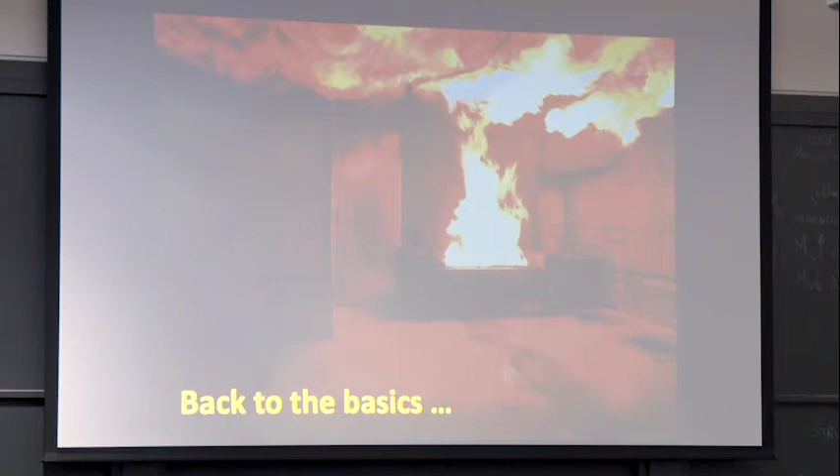So let's go back to the basics and figure out what they were trying to do. Effectively, what they were trying to solve was an energy balance. They wanted to solve the fire dynamics in such a way that you could develop a net heat flux, or the boundary condition for the structure, so that you could actually solve the heat transfer equation.

So if you take the simplest form of the one-dimensional transient heat transfer equation, the boundary condition at the surface is going to be this Q net. This becomes the goal that we're aiming at, that's what we want to obtain. Once I put the boundary condition, I can solve the energy equation, and with the energy equation, the structural engineer can perform a structural analysis. So that's the basic principle.

So at the end, the goal is to obtain this Q net. This is really what we're aiming at, okay? And for that purpose, we are going to try to solve all the energy balances within that compartment.

Now the problem is that, as with all fire problems, the moment you start digging into it, you realize it's a little bit more than what you thought. Many times we have to chew more than what we can, and this is exactly what ended up happening at this point.

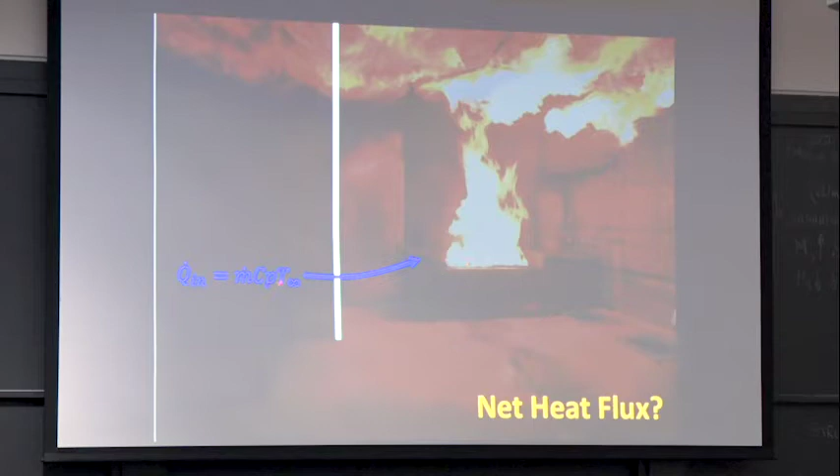So basically you have the easy term, which is the energy entering the control volume, which is going to be the mass of airflow coming into the control volume times the specific heat times the ambient temperature. That's the energy input from the air.

Then you're going to have the energy generated, which is the heat release rate, the burning rate multiplied by the heat of combustion. Okay, now then you have the energy that leaves the control volume, but in this case the temperature doesn't have to be constant.

So effectively you're going to have a temperature distribution in Y and Z leaving the door, times the specific heat, times a flow rate that also varies along the opening. So you have to have a double integral of the energy being advected through the door, plus the area of the opening multiplied by the radiation that is being expelled.

So effectively you have a hot room and it's radiating out. You're losing energy through radiation and through advection, mass that is taking energy outside the compartment. As you can see, because you have distributions of temperature around the compartment, effectively you have to solve this as a function of the surface area of the door.

So here's energy in, energy generated, energy out. If you do energy in minus energy out plus energy generated, that gives you the change of energy in the control volume.

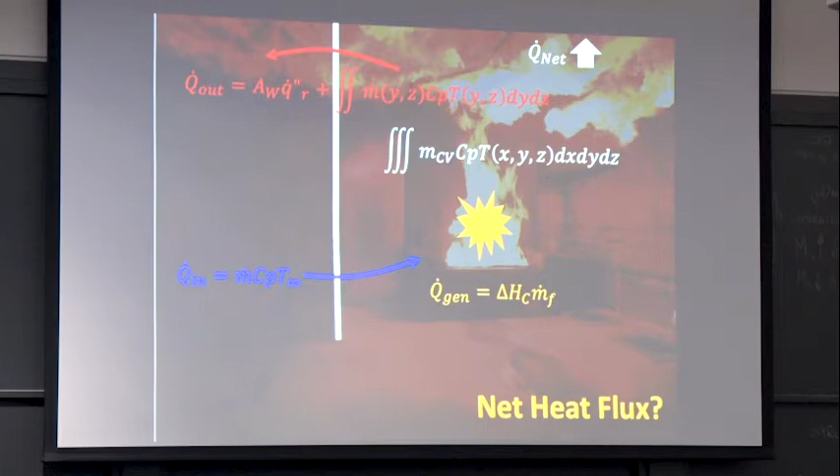Now in this case, it's a triple integral because it's the volume of the compartment, and it's going to be the mass of the control volume, the specific heat, times the temperature of the control volume in X, Y, and Z. So if I want to do the full energy equation, effectively this is what I get.

So the change of energy of the control volume is equal to the energy generated plus the energy in minus the energy out minus the energy going to the structure. So it's just a simple energy balance in concept, but an incredibly complex problem in practice.

Each one of those terms is incredibly complicated to obtain and very, very difficult to model. It is perfectly clear that even today our CFD tools cannot model this type of compartment fire, because keep in mind that we are in the ventilation limited regime. In other words, we don't have enough oxygen entering the compartment, so we have very incomplete combustion.

And modeling incomplete combustion requires you to be able to resolve the flame thickness. We don't have the capacity to resolve the flame thickness, so we cannot introduce the chemistry, and because we cannot introduce the chemistry, this is very difficult to model.

This makes the assumption that combustion happens only inside the compartment, not accounting for burning in the exhaust. Actually, that's not the assumption, because my control volume is the compartment itself. It could be burning partially in here. I haven't defined what this number is, or the completeness of the combustion, so whatever extra spills out of the compartment might burn outside. That's effectively the problem.

Very rapidly it became clear that you could not do that, and even now you still can't. I was talking about Hoyt Hottel's paper at the beginning, discussing the history of fire research, and the ideas of Thomas and Kawagoe, how they started this field of science, if you want to call it that. That was all in the first paper by Hoyt Hottel.

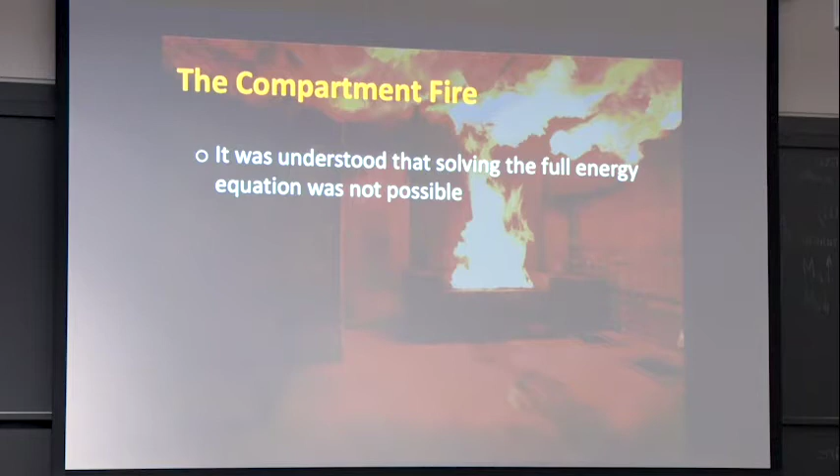In the final paper, by Howard Emmons, titled 'The Next 100 Years,' he predicted that the full solution of this energy equation would not be solved until 2050. That was Howard Emmons' prediction. I'm more and more confident it's going to take a lot longer than that. He wrote that in 1986, expecting 2050 to be the moment we'd finally solve this energy equation correctly. We'll see what history tells us when we get there—though probably I won't get there.

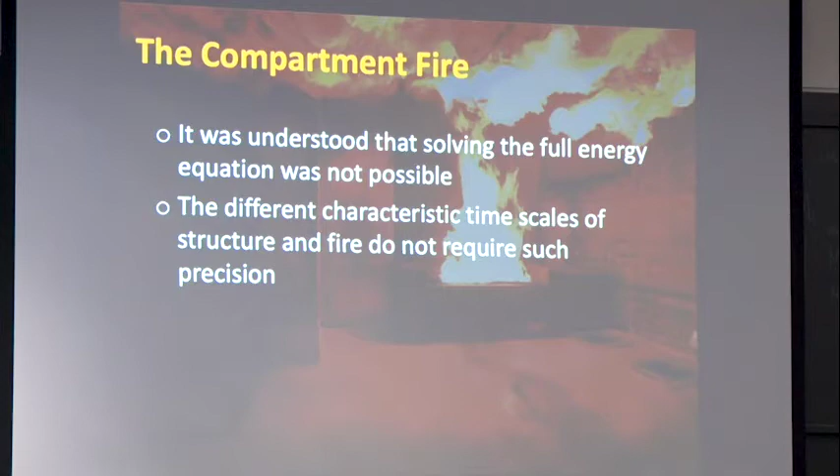The different characteristic timescales of the structure and the fire don't require that precision, fortunately, because the combustion processes are incredibly rapid compared to the heating of the structure. So averaging in time is actually very appropriate here, because all the fluctuations of combustion are somehow irrelevant to the heating of the structure, which heats up very slowly. Effectively, the structure acts as an averaging process, damping the impulses from the fire, integrating all the changes. Because the structure heats up so slowly, that allows massive simplifications in the problem.

So we looked for a simplified formulation: Thomas's compartment fire formulation. This is what a Thomas compartment looks like. It has a restricted area—this would be the restricted area of the compartment—and restrictions on window sizes. It's a very simple, small box, roughly cubic in nature, consistent with Victorian era buildings. Thomas describes two regimes.

It's really interesting how those regimes are described. In the picture on the left, you have a small compartment with a small window, which allows smoke to fill up the compartment. Once the smoke fills the compartment, velocities in the interior drop to almost zero, because the smoke doesn't allow the flow to move inside. All the exchange of mass happens at the window or door. So the compartment is completely filled with smoke to the point that velocities approximate zero, and all the exchange happens at the door. The velocities die out rapidly, and you get all the mass exchange happening at the door, based on hydrostatic pressure—low density here, high density there—creating a pressure difference between inside and outside that drives the flow exchange at the window.

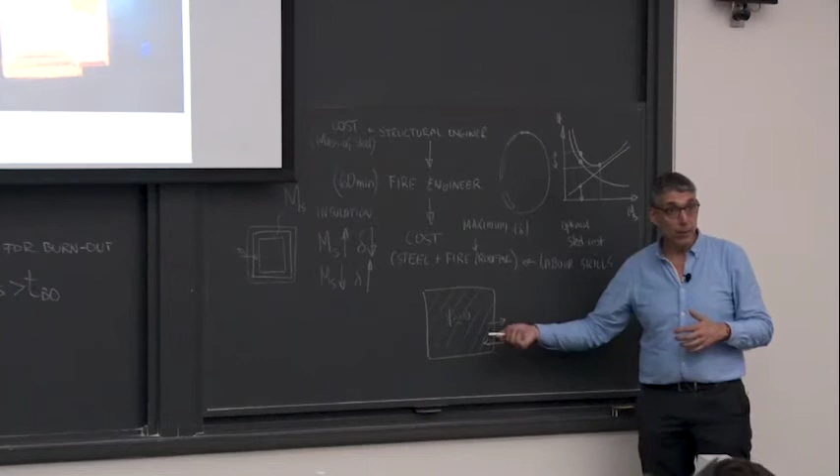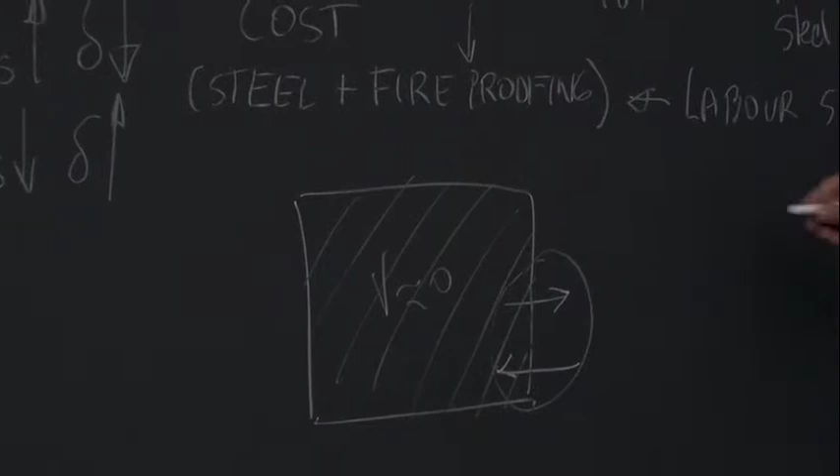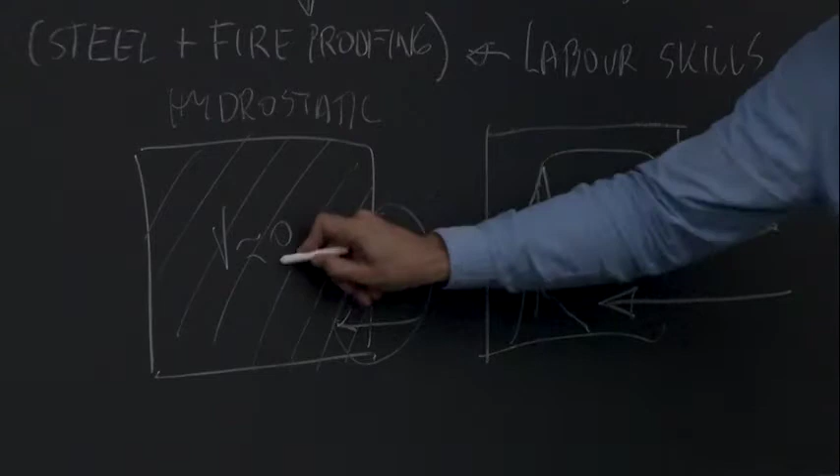Because the velocities go to zero, the fluid mechanics disappears—this is purely a hydrostatically controlled problem. All that controls it is what's happening at the door. Now, if I open the window and make it much bigger, I get a completely different problem. Here's my fire: it acts as the pump. Flow comes in, goes up, hits the ceiling, creates a stagnation flow, and goes back out. The velocities are much greater than zero throughout the compartment. So this one is hydrostatic—velocity equal to zero—and this one is momentum driven.

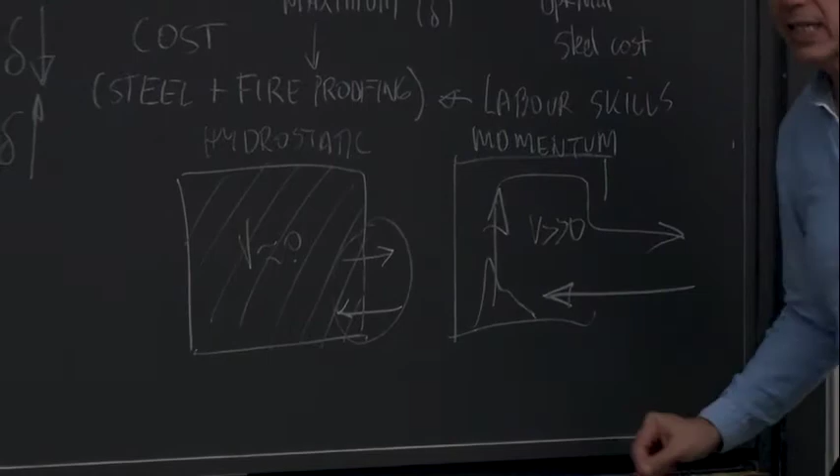Now, the problem is that if it is momentum driven, and you have this very large velocity going in and out, you have to solve the fluid mechanics. The fluid mechanics are incredibly complex in this case, because you have a buoyant flow confined by this compartment, creating a flow field that is incredibly complex. That flow field determines the characteristics of the combustion, and the characteristics of combustion determine the total heat transfer to the structure.

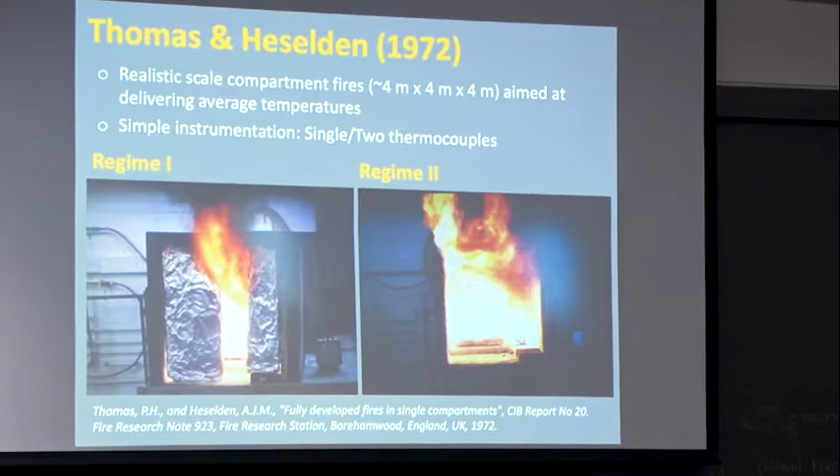So this problem Thomas deemed unsolvable. He says, there is no way I can solve this problem. This one, I can. The moment the velocities go to zero, I don't need to solve the fluid mechanics, and I can treat the problem as purely an energy balance within a static control volume, where the energy being created is purely controlled by the hydrostatic supply of oxygen into the compartment. Keep in mind, I have excess fuel, so all the oxygen that comes in gets consumed.

So the heat release rate is a function of how much oxygen I can get in. I can calculate the heat generation directly by doing a hydrostatic Bernoulli calculation at the door. Here, I cannot calculate the heat generation because the oxygen is entraining so much that I have no idea how much air I'm bringing in, and no idea how much fuel I'm burning. I'd have to calculate the burning rate and all these things. So there, there's no way I can calculate the heat generation, while here it's just a matter of how much oxygen I'm bringing into the compartment. This problem is infinitely simpler than that one.

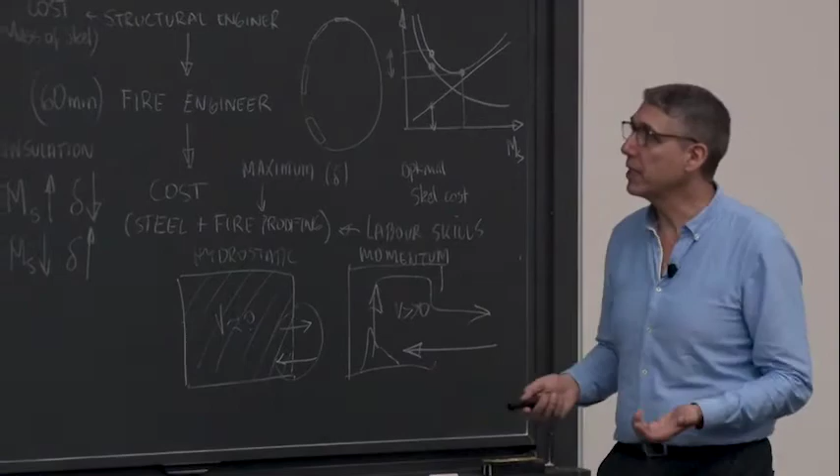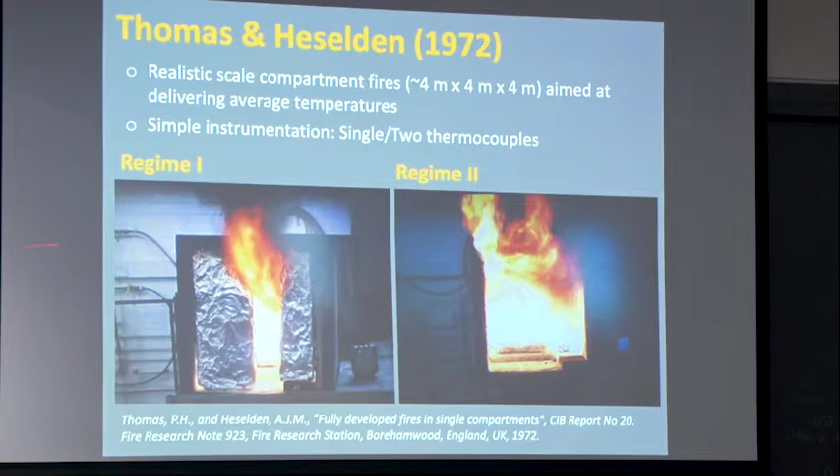That's exactly what Thomas did. Thomas and Heselden, this is the main paper of Thomas. He said, let's split the problem in two. We're going to have regime 1 and regime 2. Regime 1 is perfectly solvable, I can give you an answer to that problem. Regime 2, I have no clue—you shall not build like that. Pure genius, no? Having the power to do that, to say you shall not do it because I don't understand it—it's really a powerful message.

So for the case 1 that we can solve, isn't it like the flashover condition that we're avoiding?

No, this is all post-flashover. So basically this is fully developed, because the smoke is accumulated all the way down. Yeah, you fill the compartment because you flashed over, so you have fuel all over the place. So they're both fully developed. Now, many times this one is confused with a growing fire, but it's not a growing fire—everything has ignited, so it is flashed over.

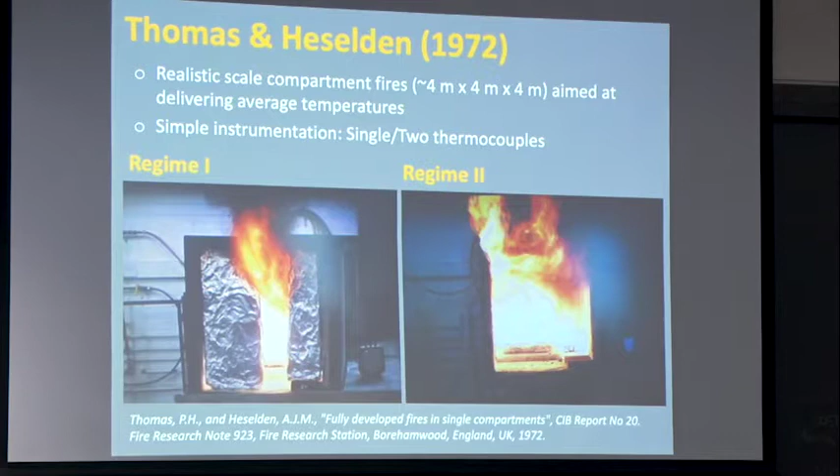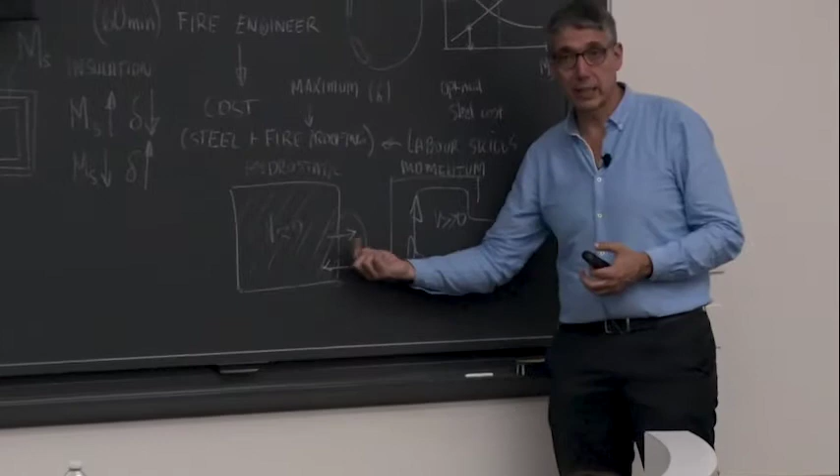It's just that because it's momentum driven, it creates such a flow field that it still has two zones, the hot zone and the cold zone. But the hot zone is radiating so dramatically that effectively you are post-flashover—if you put any solid in there, it will ignite. It's simply a different regime that is momentum driven. So the difference between the two is that one is hydrostatic driven and the other is momentum driven. You don't know what the stoichiometry is here, so I don't know if it's under-ventilated or over-ventilated—I have no idea, because I cannot recreate the fluid mechanics. This one I know is fuel rich, because I can calculate how much oxygen gets into the compartment. But this one I have no clue.

So effectively those are the two regimes. This is a perfect example of a fire in regime 1. If you look at it, it almost seems that's not the case, because what Thomas is doing is an approximation—air has to go in, there's going to be an area clear of smoke at the bottom, a gradient of temperatures, and smoke isn't going to be all over the place. But basically what he's saying is you can approximate it as such. That's the approach, but this would be a typical case of a regime 1 type fire.

Sorry, what was he solving for? He was solving for... I haven't got there yet, I'm going to get to the solution.

So I'm just explaining what the two scenarios are, and then I'll explain what he was solving for. What are the assumptions he's going to make for regime 1? Before we can solve it, we have to go through the assumptions.

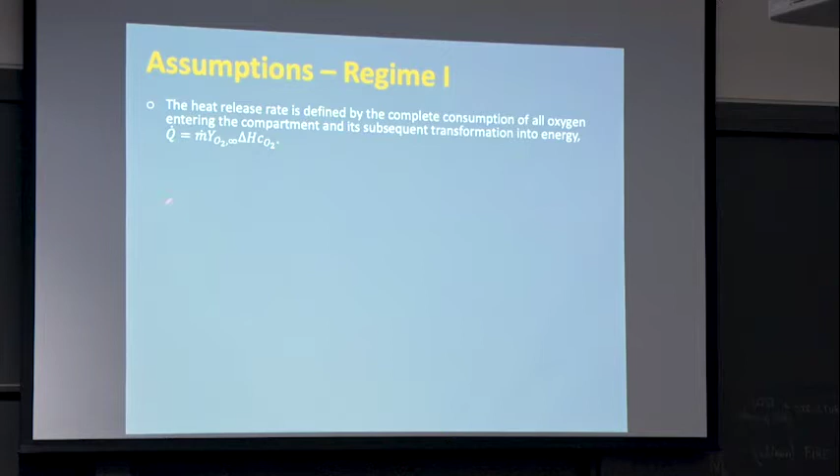His first assumption is that the heat release rate is defined by the complete consumption of all oxygen entering the compartment, and its subsequent transformation to energy. Effectively he's saying it's fuel rich - all the oxygen that gets into the compartment will be consumed and turned into energy. That changes the problem of the heat of combustion to be the heat of combustion per kilogram of oxygen. So this number becomes 13.1.

So you have 13.1 megajoules per kilogram, the ambient oxygen concentration, and the mass flow at the opening. That gives kilograms of oxygen per second multiplied by joules per kilogram of oxygen, giving joules per second, watts. So the heat generation is defined by this very simple expression.

You're consuming all the oxygen, the concentration of oxygen inside the compartment is assumed to be 0. What does that do for the energy equation? It eliminates the need to define the oxygen concentration in the outgoing combustion products because it's 0 - all the oxygen is consumed, nothing is coming out. It eliminates the need to resolve the oxygen transport equation within the compartment because you're turning everything straight into energy.

It limits the analysis to scenarios where there is excess fuel availability. That is a constraint, but it's accepted that in regime 1, that's what is happening. The chemistry is fast enough to consume all the oxygen transported to the reaction zone - you're assuming a very strong fire, very strong combustion reaction, very fast chemistry. You're consuming all the oxygen, nothing gets out.

The control volume acts as a perfectly stirred reactor - he's assuming everything is homogeneous. So while we know there are some temperature gradients and concentration gradients, he is effectively assuming everything is homogeneous. So I'm dumping energy into the compartment, shaking it like a perfectly stirred reactor, and it has an homogeneous temperature distribution. The heat of combustion is assumed to be invariant.

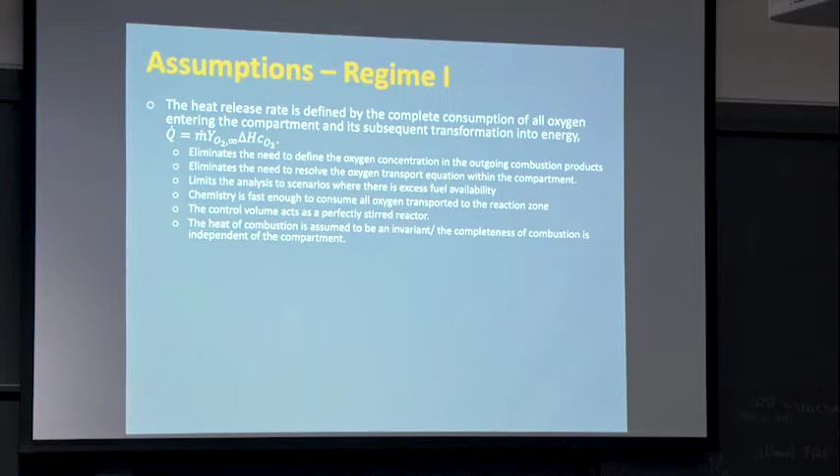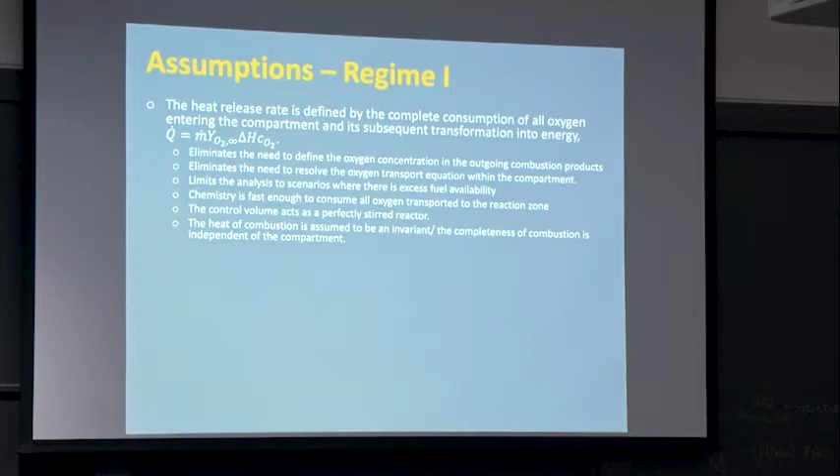The completeness of combustion is independent of the compartment. So effectively, he is not doing incomplete combustion, he's doing complete combustion, thus having the worst case scenario. You could put a combustion efficiency fraction if you want, but the reality is he stayed conservative and said let's make it complete combustion - 13.1 is what we're putting in there.

The second assumption was that radiative losses through the opening are assumed to be negligible. Therefore, Q out is treated as an advection term - all you get is convective flow coming out because you're assuming radiation out of the door is negligible. Interestingly, Harmathy didn't believe Thomas, and he went and did a whole bunch of experiments to prove Thomas wrong, and he ended up showing that Thomas was right.

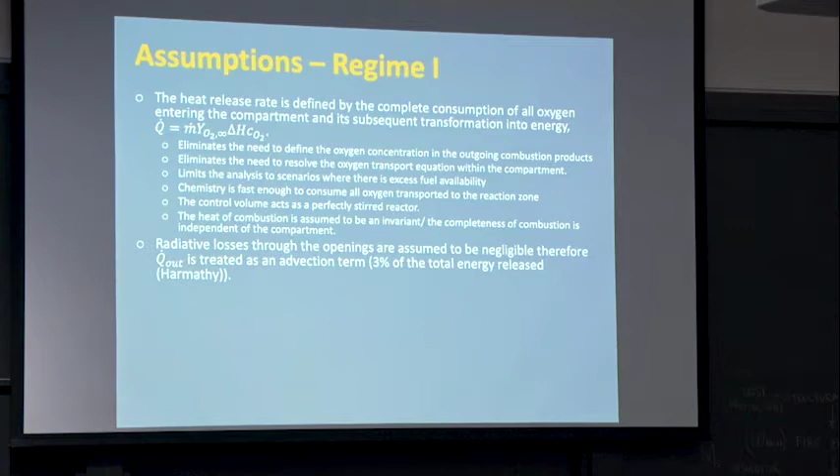He published a really nice paper showing that of the total energy release, about 3% goes away on radiation. This is because you have a small opening - the processes happening in and out are so rapid that effectively you're generating a massive amount of energy.

In reality, if you look at it, you have a small opening and your radiation is a fixed temperature times an emissivity of 1 times sigma T to the 4th - so it's a fixed number. If I generate 10 times more energy, I make this relatively smaller. You're generating energy so rapidly that effectively your losses due to radiation are negligible compared to everything else. This had to be proven by experiments, and that's what Harmathy did.

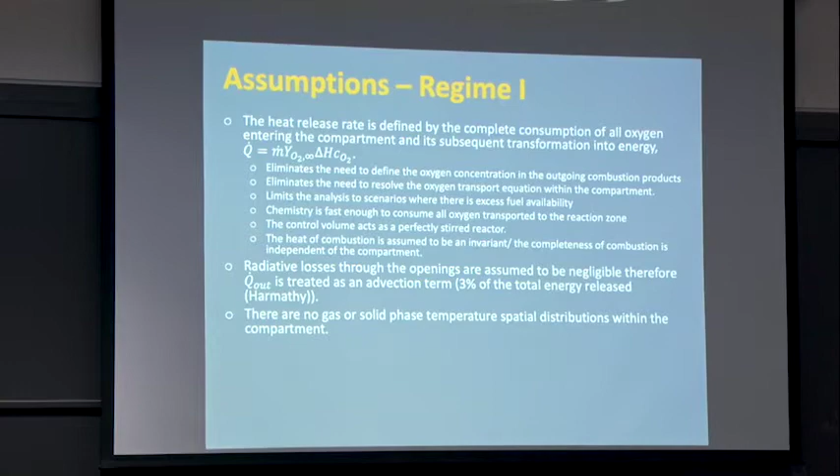So there are no gas or solid phase temperature spatial distributions within the compartment - in other words, he assumes the whole compartment is at the same temperature. So there's only one solution to the problem, which is the temperature of the compartment. That's what he's going to try to obtain. If you have the temperature of the compartment, then you can put a heat transfer coefficient and find your heat flux to the structure.

So the solution to this will be what is the temperature of the compartment, and there's only going to be one because it's not spatially resolved - it's a perfectly stirred reactor, everything is the same temperature.

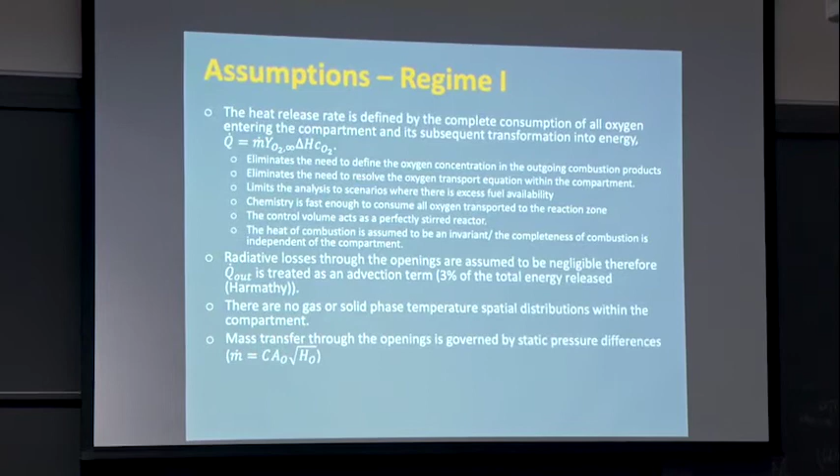The mass transfer through the openings is governed by static pressure differences. In other words, it's Bernoulli. So this is an orifice plate correlation that basically says the velocity is proportional to the square root of the height of the opening, okay?

And the velocity multiplied by the area gives you the flow rate. And then the density and all the other terms, gravity, they all go into this constant C. So if you do Bernoulli on an orifice plate, you're going to get that expression with a bunch of constants, and all the constants go into this term C.

So basically, he evaluated the C, and they came up with values that were appropriate. And again, there was another exchange between Thomas and Harmathy into what should be that value of C. There were different values proposed by both Harmathy and Thomas, but at the end, they actually converged on a value of 0.5. Okay, so effectively, those are all the assumptions.

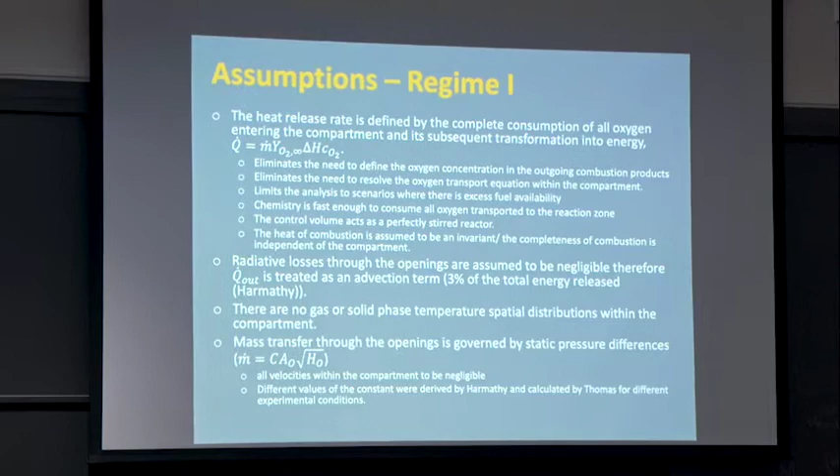How do you categorize which is regime 1 and which is regime 2? Is there a relative size of the opening? Because I'm assuming the 3% was tied to a special case.

Yeah, so this is all regime 1. How do you say it's regime 1 versus regime 2? Well, I'll show you. So they're basically going to come to the conclusion of what is regime 1 when the theory doesn't work. So you put the theory, you put the experiments, and when the experiments deflect from the theory, you say that's the separation of the two.

Keep in mind the arguments between Thomas and Harmathy happened after Thomas published his paper. So he already had defined regime 1 and regime 2, so when Harmathy went and validated the correlation, he was doing it only for openings that corresponded to what Thomas had labeled as regime 1. Okay, so this is what he did.

So basically, this is your energy equation now, according to the simplification. So basically, I have a single temperature, that's the temperature of the compartment, that represents the whole temperature of the control volume, and the control volume will be this entire thing. Okay, so it's the mass of the control volume times the specific heat times the temperature.

And so the change of temperature with respect to time, the energy of the control volume change with respect to time, is the heat generation plus the heat in minus the heat out minus the net that goes to the structure. Is that okay? So the first thing you can simplify is that Q in is much smaller than Q out, because Q in is fresh air coming at ambient temperature, so it's mCp T infinity.

Now this is very important because we need to understand what is A. A is the area through which heat can be transferred. So what is physically A then? The area of all surfaces? Yes, minus the openings, because the openings are accounted differently. So it's the area of all the surfaces minus the openings.

Now, are you losing heat through the fire? No, so the fire is burning at the bottom, so it's minus the floor. Is that okay? So this area is the net area of Thomas, and effectively is the entire area of the compartment minus the openings minus the floor, because the floor is where the flames are, so no heat is being lost to the floor.

You look with a very skeptical face, Tarek. Yeah, sorry, I missed the reasoning there. I don't understand that. Okay, so this wall is colder than the fire, so you're going to lose heat through this wall. You're not going to lose heat through the openings because I already accounted it as a flux. Okay, so basically it's energy in, energy out. There's no surface through which there's conduction in there.

It's just basically convective. So I can take from the total area of the compartment, first of all, I can take the openings out. Is that okay? Now, if you look at the floor, and the floor is all burning, keep in mind this is post-flashover. Who is hotter, the floor or the fire? I mean, the fire is emerging from the floor.

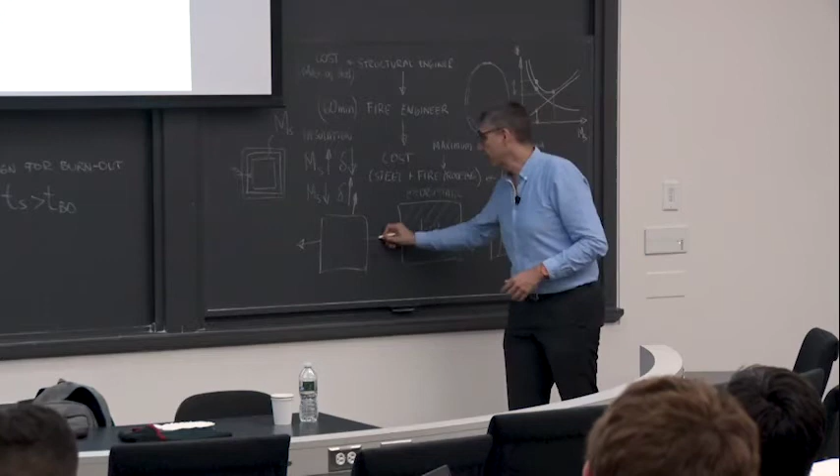Okay, so if I look at my control volume, this is your control volume, okay? This surface of the control volume is losing heat. This surface of the control volume is losing heat. This surface of the control volume is losing heat. This surface of the control volume is putting heat in. That's where my heat generation is coming from.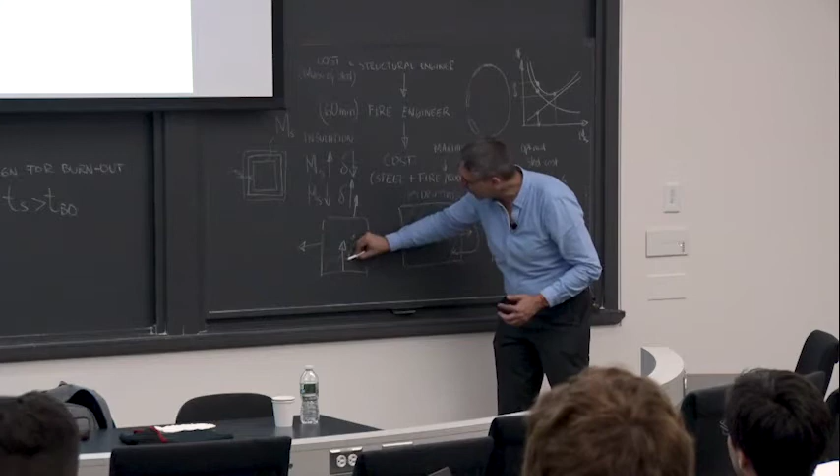Okay, that's the way he frames it. And of course, the flames are somewhere around there, okay? But his control volume is defined outside the flame. Keep in mind, there's no reaction, there's nothing. He's just basically putting energy into the control volume. He knows what the quantity is, and that energy is coming from this surface of the control volume.

And of course, behind the control volume, there will be another control volume, where this flame is actually losing heat this way, is producing fuel that way, okay? And there's going to be heat losses to the back. But that's a different control volume.

Is that okay? Yes, I was going to ask why can't we extend our control volume down if we're concerned? Of course you can, you just don't want to.

It's too complicated, just keep it simple. Keep the control volume close in there so that you can actually have a box of gases that is getting energy, that's all he wants. It's pretty straightforward. You can complicate this as much as you want, but that's not the point. The point is to make it simple.

So don't lose focus, okay? We want the temperature of the gas. We don't care what's happening with the flame, okay? So here we have all our terms.

The first thing he says is, I'm going to make the problem steady state. Why does he make it steady state? Because he says that effectively I can average the combustion endlessly, and it doesn't really matter. The worst condition will be when the structure has reached its steady state. That will give me the hottest temperature of the fire. So if I use the hottest temperature of the fire to do my heat transfer, that's a worst case scenario.

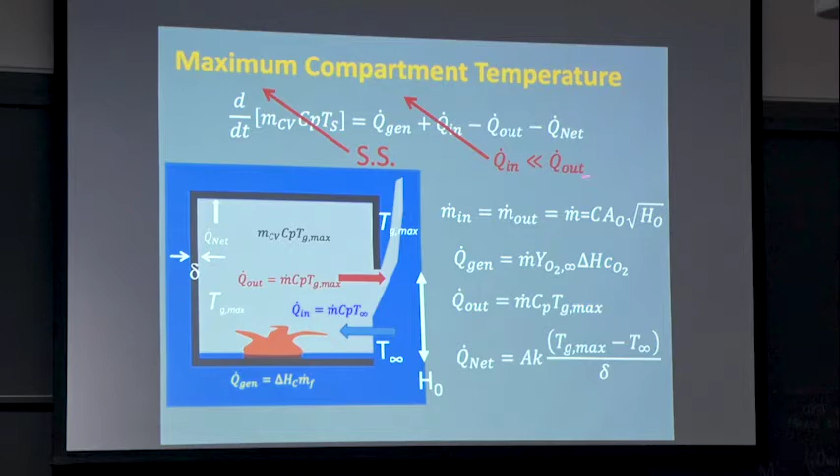I get the maximum temperature of the compartment, and if I use that as a reference to calculate my entire heat transfer, I will get the worst case scenario. Is that okay? So there it goes, the term goes away, becomes 0. Then Q in goes out because Q in is much smaller than Q out. And then the equation that he needs to solve is this.

Is that okay? So this gives you this as an answer when you substitute everything, and I'll show you what the different terms are. So effectively, all I'm doing is I substitute the heat generation, which is going to be the mass times the concentration of oxygen times the heat of combustion. I know that. I'm going to substitute the Q out as being the mass times the specific heat times the maximum gas temperature, the temperature of the gas.

And then the Q net, I'm going to substitute it as the total area, the net area, times the thermal conductivity, times T gas minus T infinity over the thickness of the wall. So I plug all this here, and I solve for the temperature of the compartment.

Is that okay? When I solve for the temperature of the compartment, this is where the genius comes up. So effectively, you solve for the temperature of the compartment, and you get two characteristic temperatures. And in a way, this is what effectively results in the elimination of combustion from the problem by understanding what you're doing.

So, the two characteristic temperatures. One is TF. What is this? The adiabatic flame temperature, no? A very simplified version of the adiabatic flame temperature, the maximum possible temperature you could get. So basically you're taking all the energy and converting it into temperature. So if you divide by CP, you get the maximum possible temperature you can get. So this is the adiabatic flame temperature.

Now, what is this? So basically, this is what he calls the conduction temperature. And the conduction temperature effectively tells you this is the energy that I'm generating, and this is the energy that is being conducted. So it's telling you what fraction of your energy is going through the walls as opposed to staying in the compartment. So, for example, if you have a huge thermal conductivity, then what happens is that your conduction temperature goes to 0.

So if you have an extremely large area, a lot of energy goes down the area, your temperature goes down to 0. If you get a big opening, still within regime 1, but if you get a big opening, that means that you're producing a lot of energy, so this conduction temperature goes up. So every single parameter becomes meaningful. Now, if you look at it in this equation, if your thermal conductivity is very high, okay?

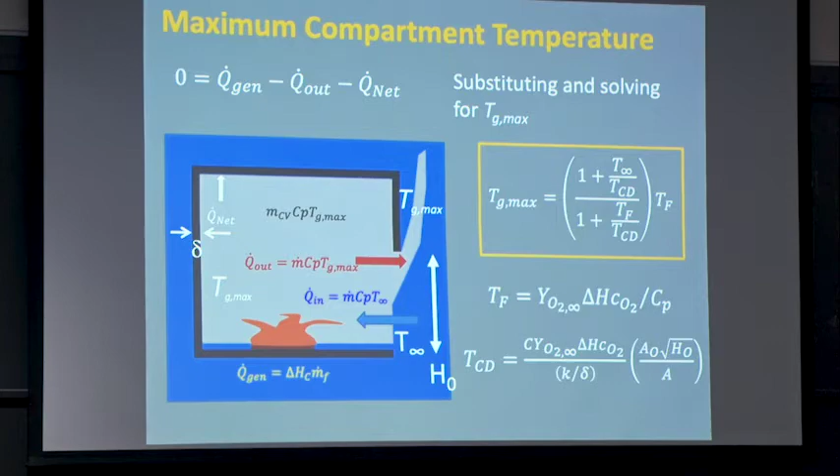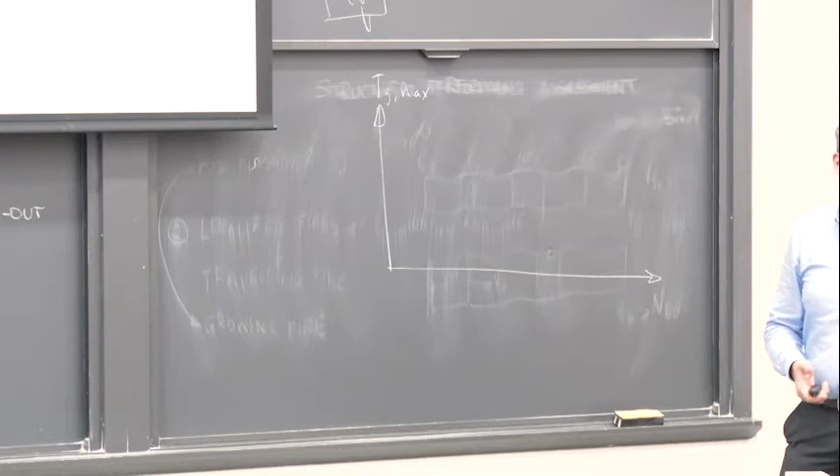So if all the energy that you produce immediately gets out through the walls, your compartment stays at T ambient. So, according to Thomas, the theory says, if I put TG max in here, yeah. So if I put TG max here, okay, and the way he does it, he says, well, all these are constants, okay? The only variable is this.

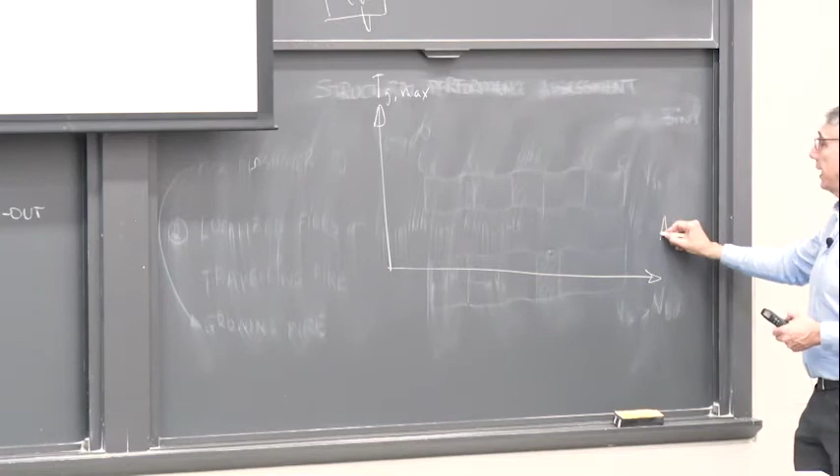So if this term is 0, then TCD is 0. If this term is very large, then this term is very large. So this is equivalent to playing with the conductivity. This is what he calls the ventilation factor. So instead of plotting it with the thermal conductivity, he plots here A0 square root of H0 over A.

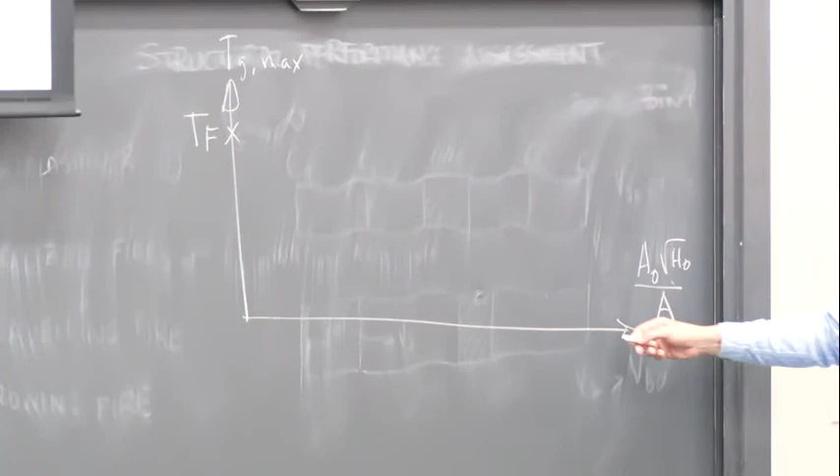So if this term is 0, you get the adiabatic flame temperature. And if this term is very large, you get T ambient. There's your theory. Obviously, it's going to curve towards the end because it's asymptotic at this point, but he wisely truncates it at some point. But that's the theory.

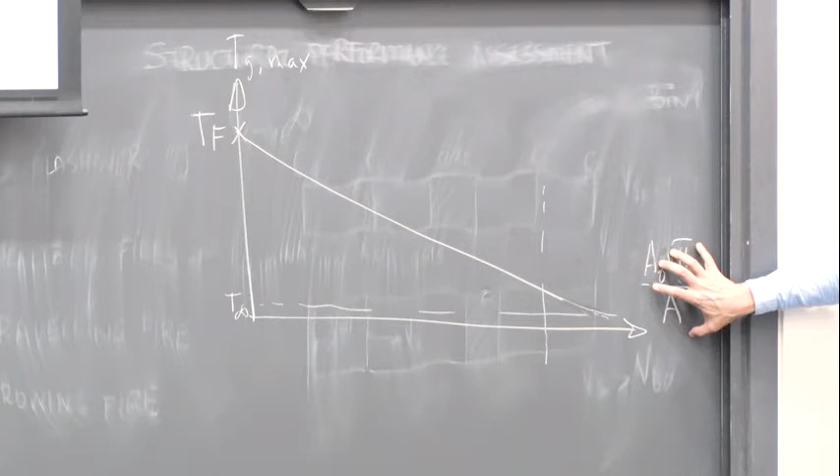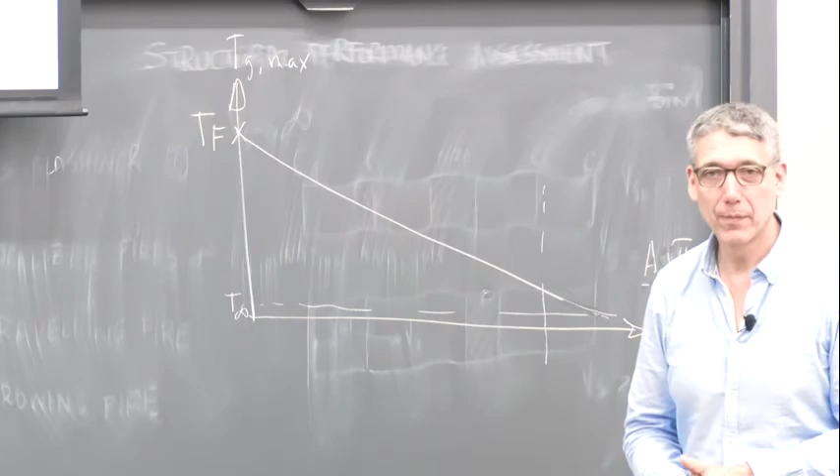Are we happy with that? And the theory depends only on one single variable, which is a ventilation factor. And that variable happens to be purely geometric. So given that it's purely geometric, for Thomas to know what the temperature of the compartment is going to be, who is the only professional he needs to talk to? The architect.

Little conversation with the architect, this is the size of the window, this is the size of the room, done. 1,000 degrees. Brilliant, no? Then he can give that to the structural engineer who can multiply by a heat transfer coefficient, they get a heat flux, they can calculate the temperatures, and they can do their job if they wish to, which they don't, but you know. But in reality, problem is solved, no?

I mean, it's an incredibly powerful framework. Simplifies not only the calculations, but the process. Because the architect can design freely, he only has to give you the ventilation factor. So what happens?

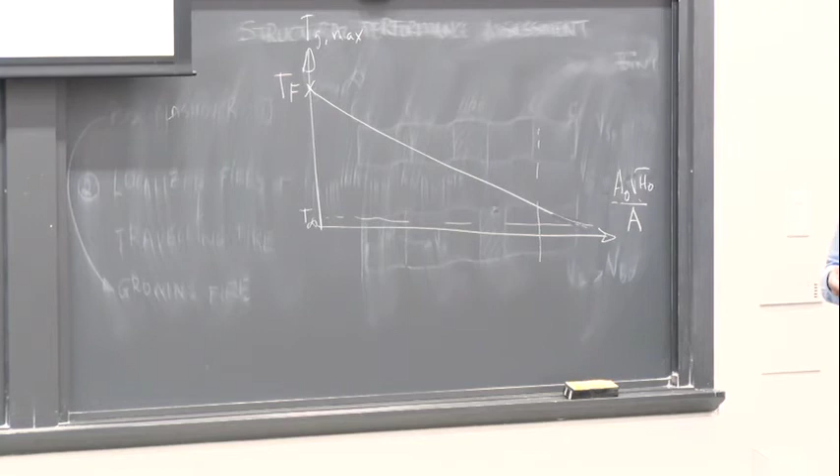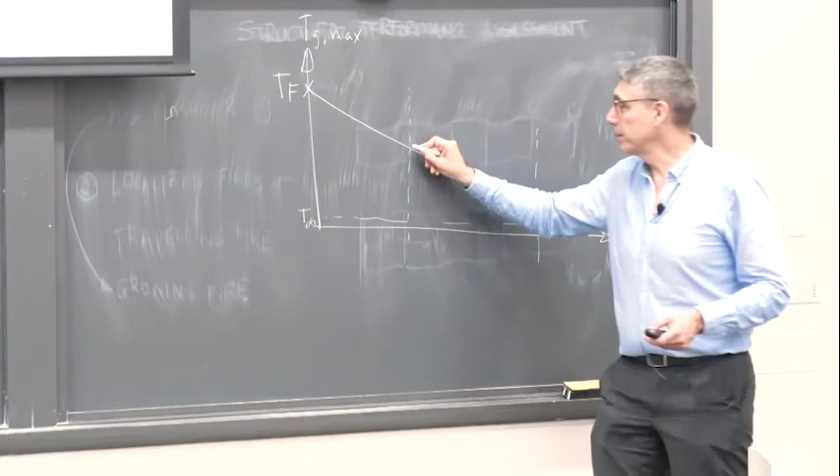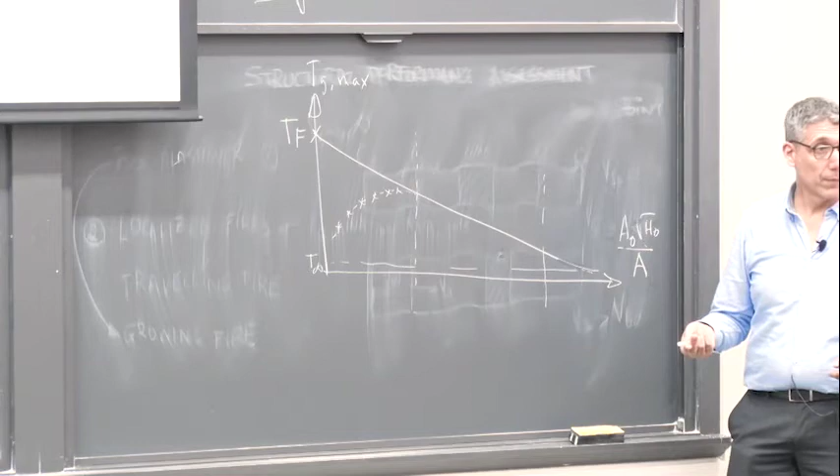It gets to a point where if you make this number the wrong number, then what happens is that effectively you cut it off. And the data starts diverging from the theory. Harmathy will claim that the theory is always worse than the data.

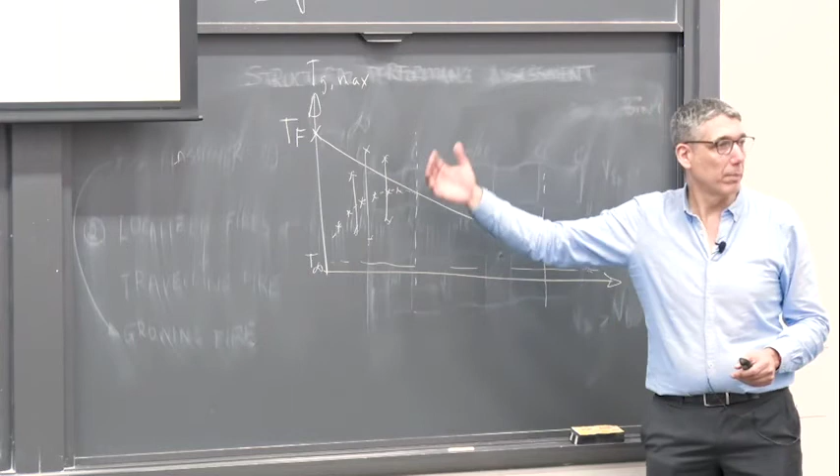Is that okay? But Thomas found always that somewhere in here there were a few straggler points. And they were all around here. And this is where the argument between the two of them was. Is that okay? Are we all comfortable with that?

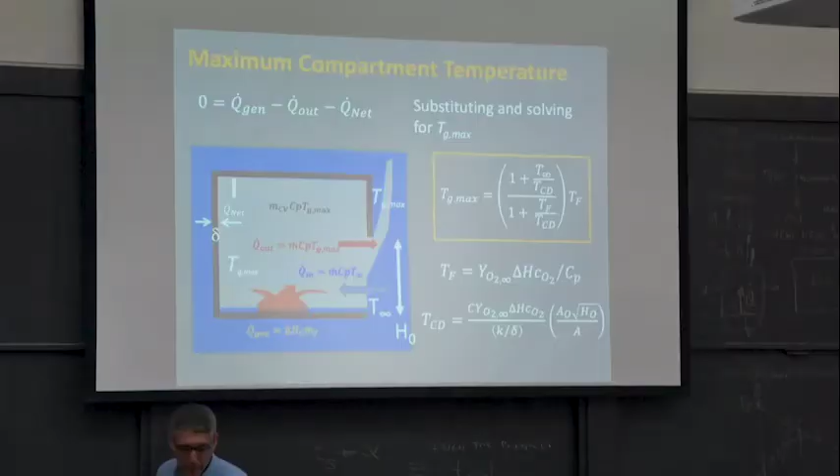Just one second. As you might notice, the way I put it in here, for whatever reason that I still will never understand, Thomas liked to put the inverse ventilation factor in his plot, which is really annoying. So instead of putting A0 square root of H0 divided by A, he flipped it around.

So Thomas used to work with this guy called Geoff Cox, because he will never talk about this, but Geoff Cox used to be his very close collaborator, and Geoff Cox was absolutely convinced that Thomas liked to write things in a very complicated way because he had very high standards for competency. So he said that people should struggle trying to understand his work, because that's the only way he could guarantee that they were smart or knowledgeable enough. And anybody that wears a bow tie and always looks like a crazy professor, thinks in those terms apparently.

But he had this whole theory about writing very complicatedly. His papers are horrible. They're almost impossible to understand. You have to literally read them 15 times before you get what he's talking about.

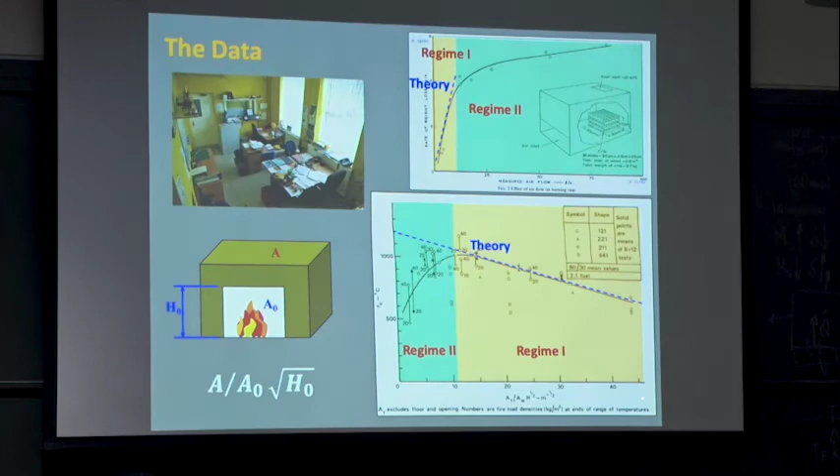So here, if you go for a ventilation factor of 0.02 and you flip it upside down, you get 2/100, so it's 50. If you go down back to this and go for somewhere around 50, you get a value around here, around probably 600. So it comes out a little bit taller here, but basically Thomas's number in principle should be somewhere around here.

Now, this number here - 50, 100, 150, 200 to 250 - is the amount of fuel that you have. So effectively, the fire becomes longer and longer as you increase the amount of fuel in the compartment. These were translated into the Eurocodes, and they're now labeled the parametric curves. Somebody put an equation that describes these plots and effectively converted them into an equation that people can use, and that basically comes out from the data.

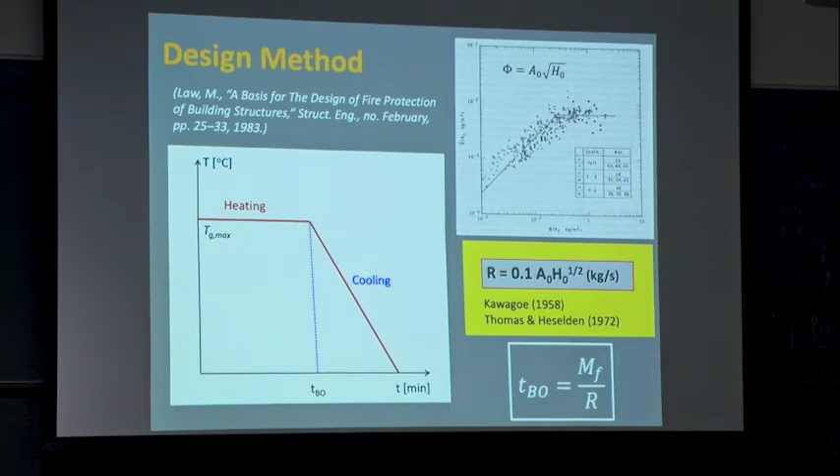Now, one of the really interesting things here is the cooling time. Everybody's interested in the heating - nobody cared about the cooling. So I left it here as just an arbitrary line.

Now, when this was done, the cooling was done erroneously, because keep in mind that these are temperature versus time, and they were using very big thermocouples. So what they are presenting there is a radiative exchange between the thermocouple and the wall - effectively, this cooling curve is not the cooling of the gas phase, it's the cooling of the solid. So if you were to do a heat transfer calculation, can you use these temperatures to calculate the heat transfer during cooling?

No, because it's already done for you. Effectively, this is already the temperature of the solid. The real gas phase temperature is ambient. The fire actually dies and falls pretty much straight down. So if you have a tiny thermocouple with radiation correction, you'll get pretty much ambient, because the gas phase cools very rapidly, so the air is actually cold. But if you have a very thick thermocouple in radiative equilibrium with the solid, what you're measuring is actually the temperature of the solid.

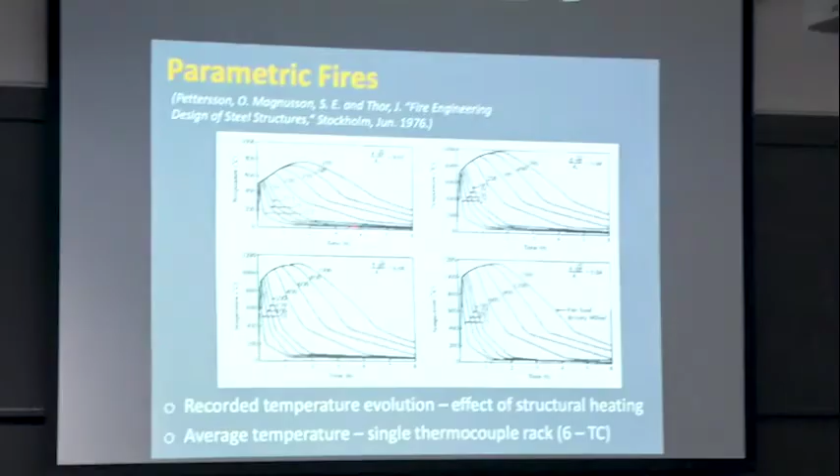So effectively, if you use this decay to do a heat transfer calculation, you're making a mistake. And many people do that, they take this plot and use it to calculate heat transfer to the solid. The problem with that is it creates a very onerous situation, because you're between 800 and 600 for another hour and a half. It's a massive amount of energy that you're transferring, but that massive amount of energy was never actually transferred there because there's no more combustion. It's simply that the solid is cooling very slowly and your thermocouple is still measuring the temperature of the solid.

Is that okay? So you have to be very, very careful when you use this type of data, so that you use it correctly.

Yes? So, are we using these still for structural evaluation, or are we using the temperature of the... Yeah.

So most people use this temperature as the input for an H, T hot minus T cold. And therefore they cannot get the right answer because they're getting too much energy into the structure, and the structures are failing. But they're failing on cooling, because they're doing the heat transfer incorrectly.

Instead of actually thinking a little bit and doing it properly, what they start doing is putting a probabilistic distribution on the amount of fuel load, and they start shrinking the fuel load. So if you put sprinklers, that basically means I can reduce the fuel load. If you put a detection system, that means I can reduce the fuel load. I'm not joking. If you actually use all the reduction factors of the Eurocode, you can go from 250 to 12.5. That's a 20 times reduction.

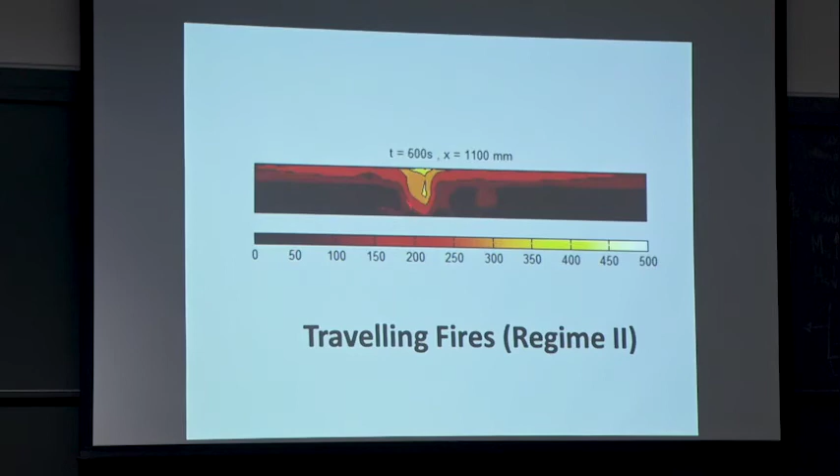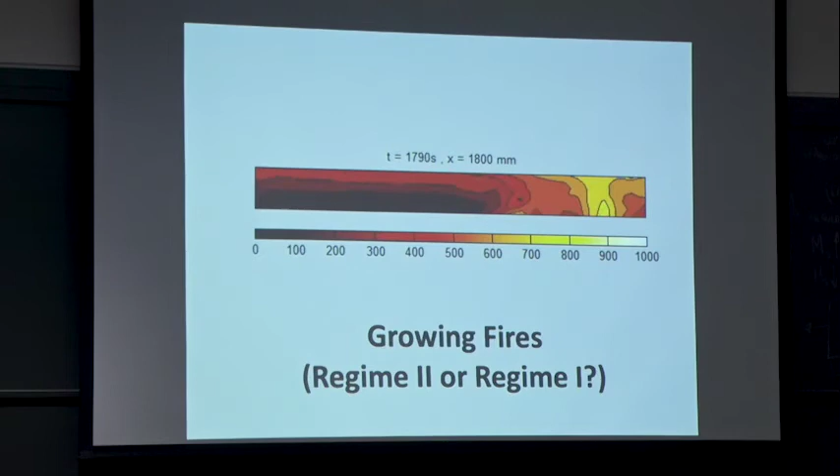Now, these are the traveling fires, and these are generally more the type of regime 2. So effectively you have a fire that cannot fill the compartment, and it's just literally moving from one side to the other. It is still a fully developed fire, but it's momentum dominated. You can also have growing fires, and you can see a fire that starts in the corner, and as it starts growing, it doesn't have time to burn out, and it continues to spread, until eventually it's going to fill the entire compartment. And there you get basically the flashover, or the fully developed, regime 1 Thomas compartment fire.

Is that okay? Now, this is data, this is not a numerical simulation, by the way. This is experimental data for this type of experiment. Some of you might have seen this. This is a Malveira fire test, and it basically shows the evolution of one of these fires from regime 2 to regime 1.

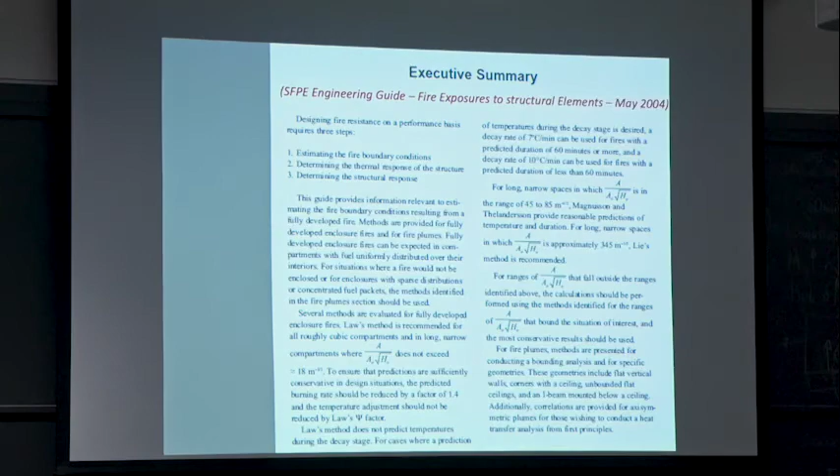So we tricked the experiment by changing artificially the ventilation factor. How did we change the ventilation factor? By changing the value of A. How did we change the value of A? By having the ceiling burning. So the moment the ceiling is burning, you've changed the ventilation factor because you've reduced the value of A, so we move from regime 2 to regime 1.

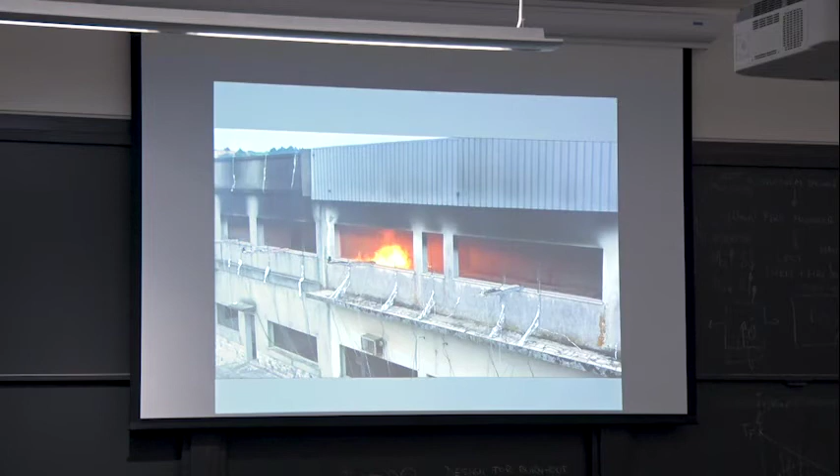So when you get to the middle of the compartment, you can see this line, this is more or less the middle of the compartment. You can see how the smoke layer starts descending. You can see the spread accelerating. And you get this very stable smoke layer descending.

You see flashover just happened? Feel the excitement, after 4 hours waiting for this to happen.

So you see the difference between the two regimes? It's quite dramatic, no?

So the problem here is that while they're extremely different, through the years, people have been trying to adapt this model almost to the point where it has become a joke.

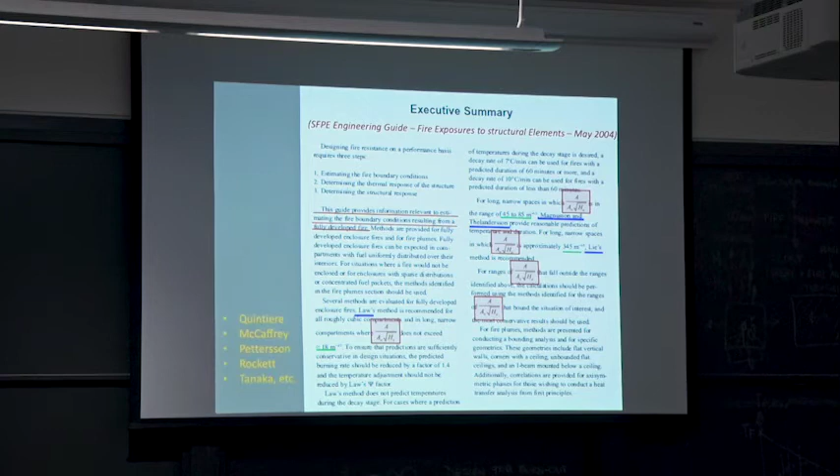And then you kept going and going and going. You have an endless list of people that have been extending the application of this. Why? Because really it's the only way we can solve this problem in a purely theoretical way.

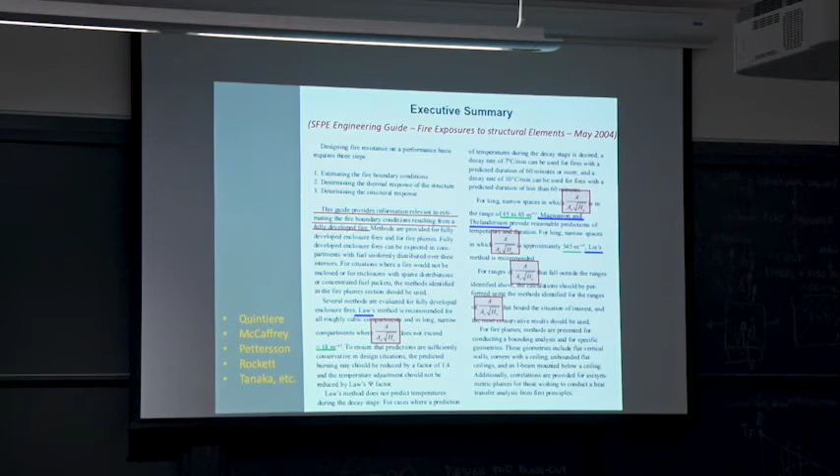So the ventilation factor is still the dominant parameter that we're playing with. It basically provides a very simple answer that is very fundamental, with very good assumptions and very clear limitations. The simple design methodology was developed to provide a worst case scenario, which is the steady state case, for the purpose of structural analysis.

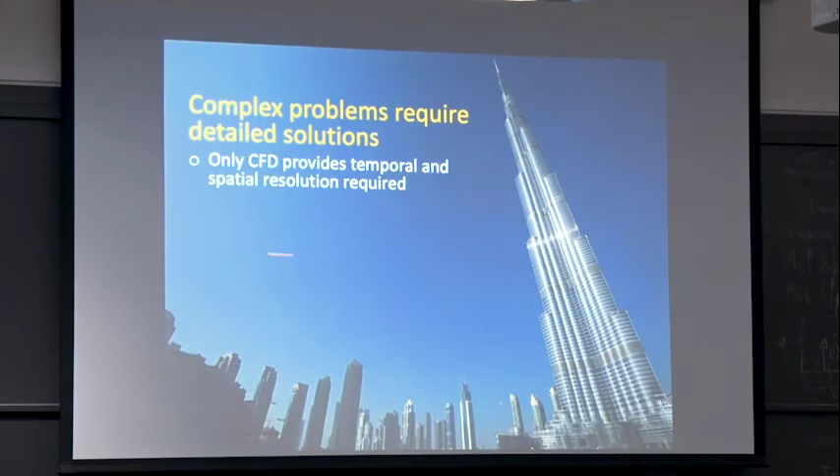So the problem is that complex problems require detailed solutions, and that's when we run into CFD. I'm going to go very rapidly through this, because the only question here is trying to understand if CFD can give us what we want.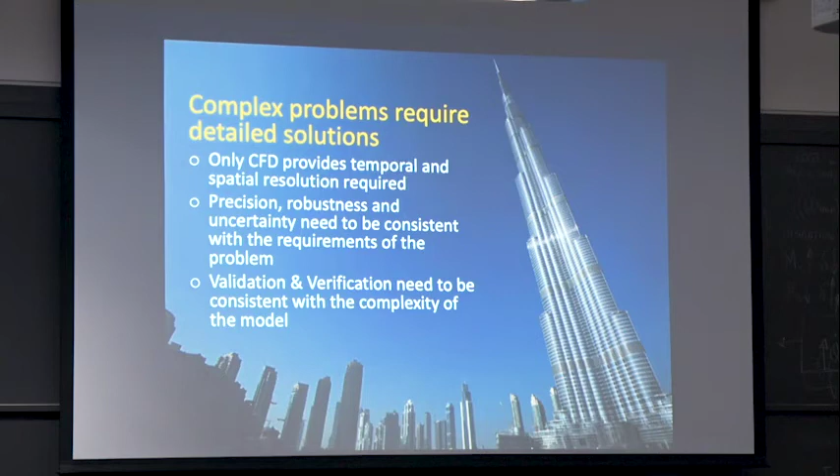Now, the problem with CFD is that you have a very complex coupling in the case of fire that requires you to be able to solve all these things. And all these things have very complex time scales and very complex length scales that are very difficult to resolve.

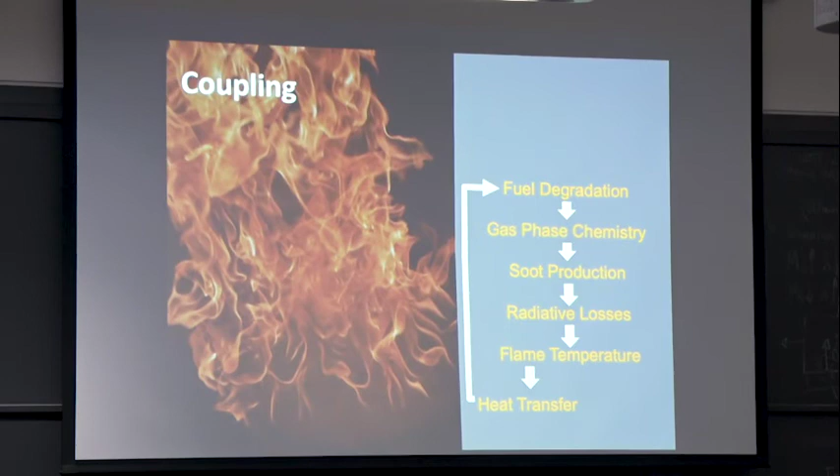So to be able to get the heat transfer, everything has to be resolved appropriately. You're going from the micrometer scale of the flame thickness all the way to the meter scale of the compartment. And if you're dealing with forest fires, you're going to the kilometer scale. So you have a very large range of scales that you need to be able to resolve.

And unfortunately for heat transfer and air entrainment, which are going to control fuel degradation, gaseous chemistry, and all this stuff, you need to be able to resolve all these scales.

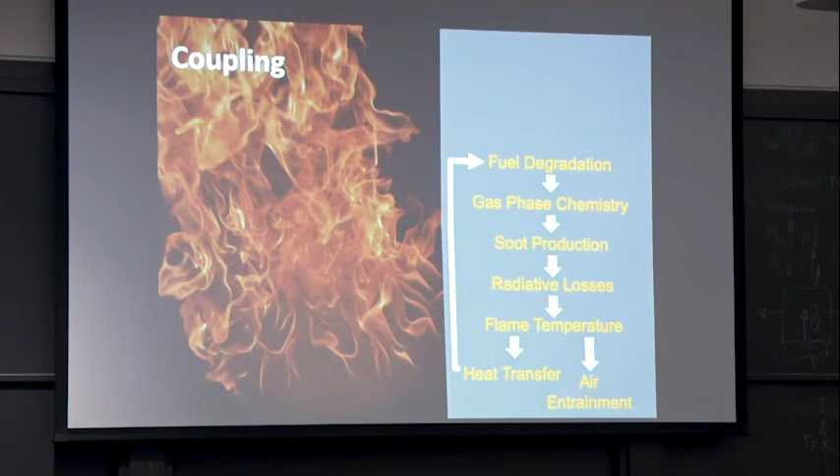Now, this is a very interesting approach that Stephen Pope presented. He gave the Hottel lecture at the Combustion Symposium in Warsaw, and he explained the problem of computational models for combustion. He said there is no universal model.

There are cases where you have very complex turbulence and very simple chemistry, where you're going to focus purely on resolving the turbulence in detail, and you're going to sacrifice the variables associated to the chemistry. And there are cases, like in perfectly stirred reactors, where effectively you can simplify and model the turbulence in a very simple way so that you can focus on the chemistry. But there is no way you can do both at the same time.

So he described different types of models in this chart, based on the complexity of chemistry and the complexity of turbulent flow. A turbine engine falls in this space, and this is the type of model you'd use. A car engine falls in this space, and this is the kind of model you'd use. A waste incinerator falls in this space, and this is the kind of model you'd use.

The problem with fire is that if, for example, you look at a problem like a tunnel...

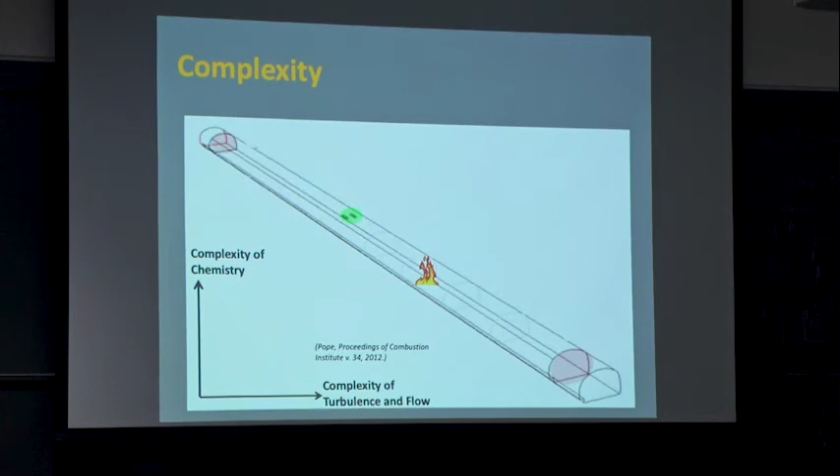If you have a fire in that tunnel, what's going to happen is that you get smoke that is being produced. Eventually that smoke is going to start moving, and your means of protection is to turn on the fans. So you're going to have fans that create a complex turbulent flow, because you're blowing air against the buoyant flow of the fire, so that you can push the smoke in this direction and people can evacuate appropriately. You have to be able to predict how to push the smoke away.

Now, once you start pushing the smoke away, if you're trying to model the fire close to the fire, you're going to have very complex chemistry, but probably the flow is going to be laminarized. So you have a very simple representation of turbulence that will fall in category number one of Pope's models.

If you want to then model the top, where the smoke starts impinging on the ceiling, then you're going to have probably very complex chemistry, but also very complex turbulent flow, because the flow has now accelerated and you have this natural convection buoyancy driven turbulent flow that is incredibly heterogeneous. So it's not that you have a homogeneous turbulent flow, you have a very heterogeneous turbulent flow. You don't have the capacity to model this with this model—you have to go to a different type of model, one that has complex turbulent flow and complex chemistry.

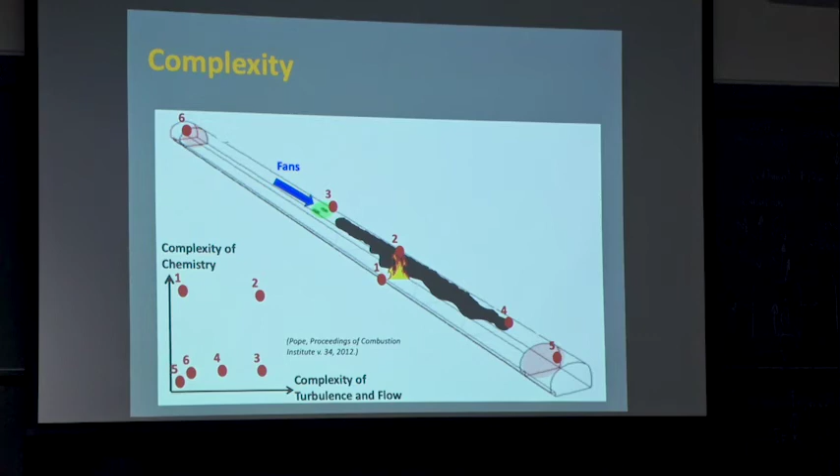So when people are trying to use, for example, FDS or any sort of CFD models to model a tunnel, what they don't recognize is that to get the tunnel right, you need to resolve the pressure drop in the tunnel correctly. To resolve the pressure drop, you need to resolve the friction in the tunnel. And the friction in the tunnel depends on the boundary layer thickness. So your mesh has to be millimeter size to properly resolve the boundary layer and get the friction out of the turbulent model so that you can create the pressure drop.

Unfortunately, your tunnel is a kilometer long. So if you have a millimeter cell grid to get your friction, all of a sudden you get millions and millions of cells, and you cannot solve the problem.

Even then, if you put that size of cell, you will not be able to use something like LES, because unfortunately LES requires operating at the scale of the big eddies, the large eddies, and these ones are much smaller than the large eddy. But even then, you cannot resolve the chemistry, because the chemistry is still two orders of magnitude thinner than the boundary layer. So even then, you create all sorts of problems, because you have to resolve all these characteristic length scales. Doing computational models, brute force, in this kind of system is not right.

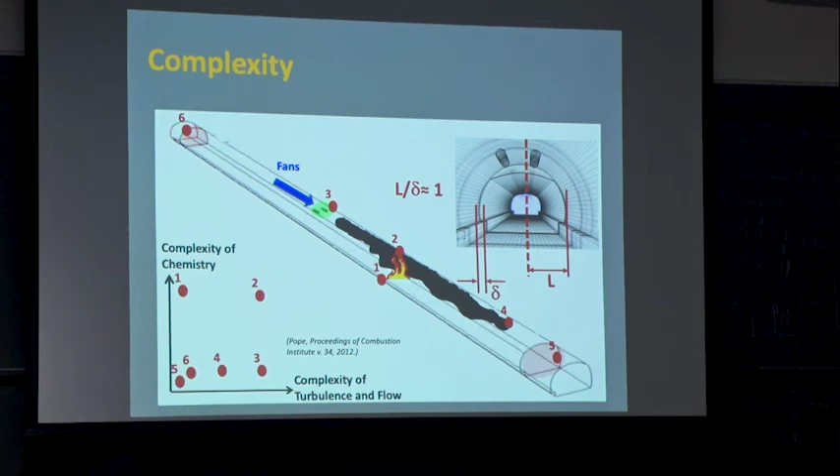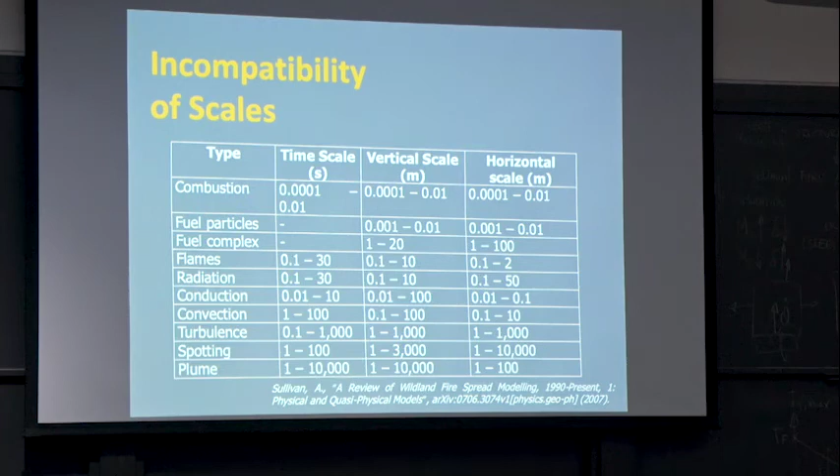You have to do it in an intelligent way. And this is a real problem. These are your time scales, these are your vertical scales, your horizontal scales, and it depends on where you are. This is, for example, for forest fires, and you can see the ranges—we go from 10,000 meters all the way to 0.0001 meter. You need to be able to resolve all those scales. So brute force CFD is not for fire.

People have done interesting approaches where you create a sub-model for the fire that, on the basis of the heat release rate and the diameter, you can use as a source input into a much more weather-type problem. It's the hybrid nature of the model that enables you to work this out. These are very common for forest fires.

Rodman Linn and all the people from Los Alamos developed models in which they treat the fire more as a source, doing a CFD model that's more of a weather type model with very large cells, and the fire is fundamentally just a source. They use experiments and sophisticated scaling techniques to integrate one model with the other.

The way they do it uses the same principles as the alpha T squared approach to flame spread and heat release rate, which we then input as a source into these large-scale weather models. This was done a few years ago with FDS5. It hasn't been done with FDS6, but it should be, because most likely you'd get the same results.

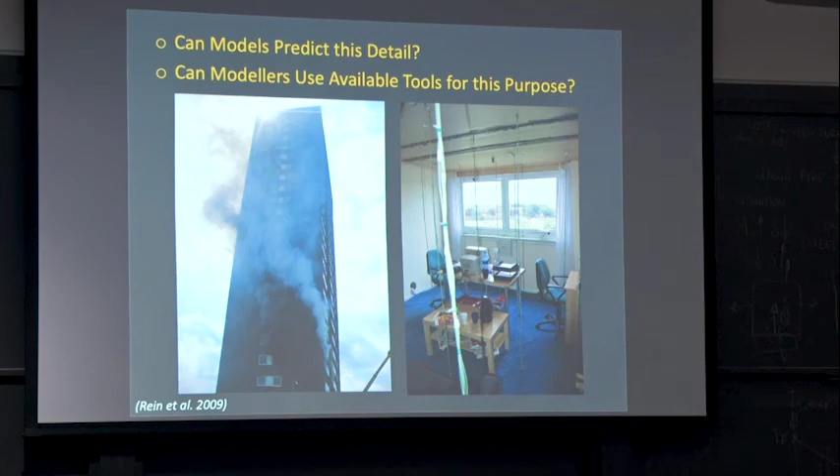When you try to understand if the models can do the job, you realize you're in trouble. This is a case of a very simple fire in one compartment that was very heavily instrumented, and the results were withheld from the modelers. A round robin was done blindly: all the modelers modeled the problem, delivered the results, and then we released the data.

Looking at the range of data delivered, this is temperature as a function of time. You get people that got it completely wrong by being very low, people that got it completely wrong by being very high, and apparently a few people that actually hit the temperature pretty much right.

But then you start looking at the heat release rate, and some of the people that got temperature right actually got this wrong. And then you look at the descent of the smoke layer, and the people that were very high are now very low.

As you look at the details of the data, effectively nobody got it right. Some variables they managed to predict, other variables they got wrong. The same people who predicted one variable right were not the same ones who predicted another variable right. You can keep analyzing all the data and realize nobody got it right.

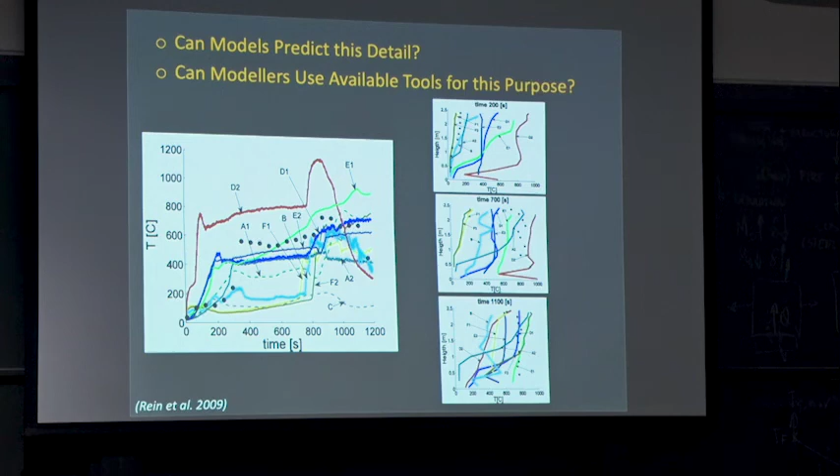For example, this is temperatures as a function of height, and you can see the ranges go between 800 degrees and 60. So it's not that they got it sort of right or sort of wrong—they got it completely wrong. This set of analysis motivated a group of people to launch a whole initiative.

The International Association for Fire Safety Science has a group that's delivering idealized experiments so people can test their models against them, to do this validation and verification in an independent and blind way. Everybody seems to be able to model a burner. The moment you move away from the burner, all of a sudden we start running into all sorts of trouble.

So the question is, are the models not good enough? The truth is I think it's more the modelers, because the problem is a misunderstanding of what level of precision you should be having, and a misunderstanding of what level of precision is necessary. That's the key.

In this particular type of problem, maybe going into this level of detail is probably completely unnecessary. The fact that we're getting it wrong is probably just a function of the reality that the problem is too complicated. But if we look at it in a more intelligent way, we probably can come up with the right estimates to deliver the information necessary to design buildings properly.

So despite the precautions, tests of this nature provide little insight to improve models because there are too many variables. People are making big efforts to deliver these things, but it's just too complicated. Right now, our fire models are not really ready for validation and verification tests. You have to work step by step, and right now we are at the level of the burner—we haven't been able to go much further than that.

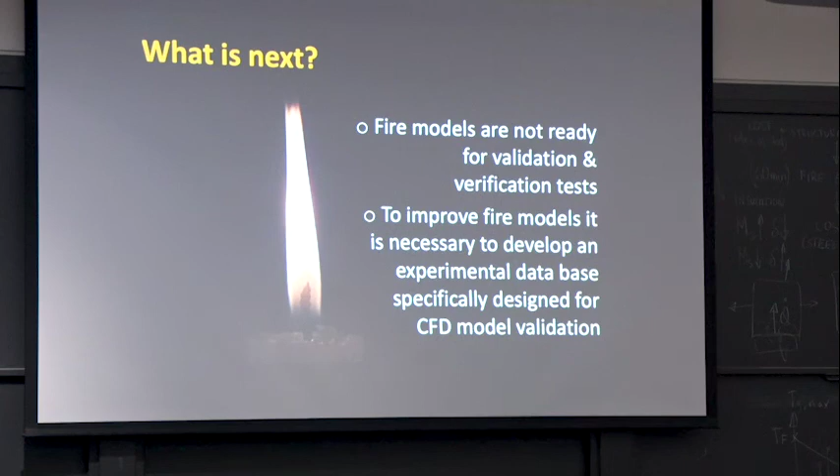To improve fire models, it's necessary to develop a very detailed experimental database, and that's one of our biggest problems, because most of our data doesn't have enough diagnostics. We haven't measured sufficient things to be able to validate the models properly. So there's a real need to do experiments in this space if we're going to try to validate CFD, and we don't have those experiments, and unfortunately those experiments are very expensive. So we really have to be quite careful about it.

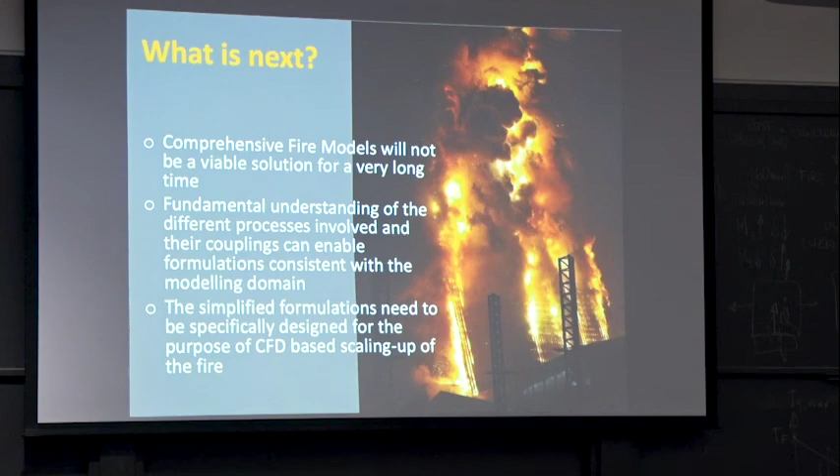So what's next in this field? Clearly comprehensive fire models will not be a viable solution, so brute force CFD is not going to work right now. We need a fundamental understanding of the processes that underpin the design of buildings so that we can formulate solutions that are consistent with what we need. So in the end, simplified formulations need to be specifically designed for the purpose of scaling up fire. I gave you a handout of a paper called 'Scaling Up Fire' that describes all this process in detail, so you get a sense of what I mean.

So what is the message at the end? Fire in itself is a problem of immense complexity that nevertheless is a problem we need to solve on an everyday basis. So the real conflict in fire is the fact that the complexity of the problem is incredibly inconsistent with the pace at which the system is evolving and the needs of the system.

We don't create our problems, we just basically have to respond. Somebody is going to change a building, somebody is going to change an aircraft, somebody is going to change something, and we need to constantly respond to that. The problem is that because we have to constantly respond, we're always behind. Our problems are always more complicated than the tools we have to solve them. So effectively, we always appear to be prehistoric, always behind everybody else.

The people doing laser diagnostics are measuring millimeters, and none of those laser diagnostics can be applied to fire. The people doing CFD are doing DNS at an extraordinary level, with a level of chemistry complexity that's effectively impossible to apply to fire. So while we appear to be prehistoric, we actually are not. We just have a problem that has completely different characteristics.

Now, what is the value of understanding combustion here? It's not about being able to model or predict or get the details of combustion. It's about being able to understand what matters in that combustion process so that you can eliminate combustion and formulate a solution that is simplified at a level consistent with the need. Once you have that, you can deliver a solution to the problem.